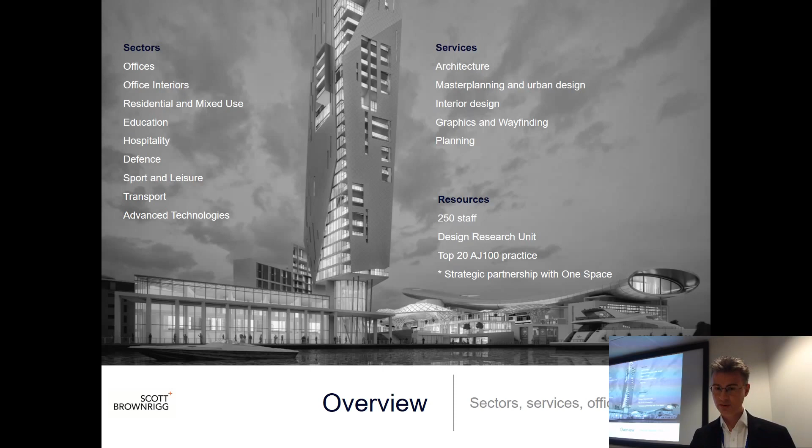What's been very exciting over the last 5 years particularly is that we've begun an expansion into overseas areas. You see here on this diagram our two major regional and fairly new hubs, those being New York and Singapore, and there's a really nice Singaporean connection with the Spark project, which I'll talk a little bit more about as we proceed.

We're doing quite well in terms of the rankings. Obviously they're just measures of how people look at how we're all doing competitively, but we're very pleased to be considered the top 20 architectural practice in the UK.

Just a few examples of recent projects, really just to demonstrate the breadth of experience that we're talking about. And one of the reasons I think that's important is because our experience in the commercial and residential sectors has influenced what we've done with the Spark project and many others as well.

So here you're seeing the Military Medical Museum in Cardiff. You may have seen a little bit about that in the press - it received some direct government funding. And this is the new headquarters building for the chip manufacturer and designer arm in Cambridge.

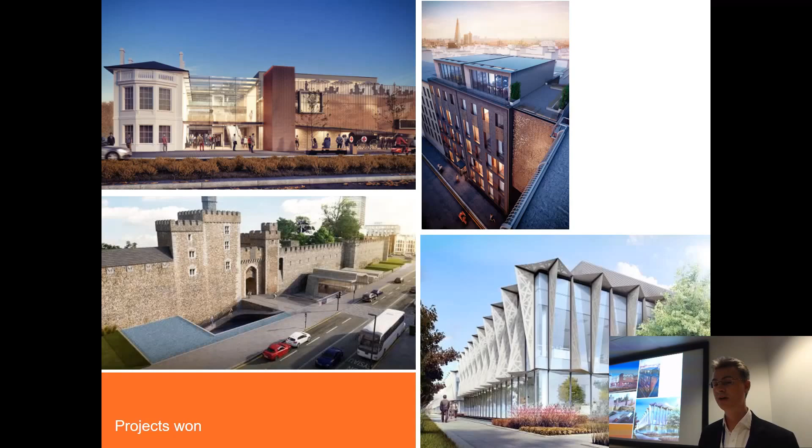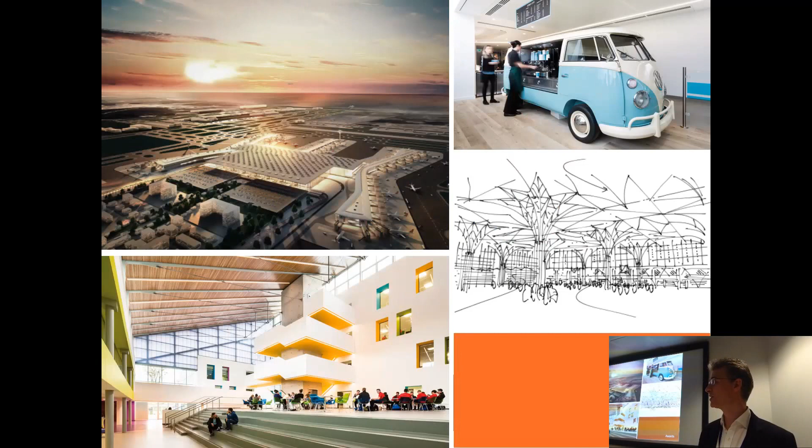Because of our size, obviously we're able to tackle really large projects, and what you see there on the left-hand side is what's currently the world's largest terminal building at an airport under construction. That's Istanbul New Airport, and we were able to be involved in that because we acquired another practice known as GMW 2 years ago, and they're now an integrated part of Scott Brownrigg.

Bottom left there, an FE college, and I'm very interested in some of the talks today because they're also about retrofits. That actually was a disused courtyard space prior to the team getting involved, complete with a stagnant fish pond and leaves blowing around in there.

Chatting to Alex before the presentation, one thing that I've found really stimulating about my business is that we're always moving forwards, we're always looking to change, and of course we live in times of great uncertainty and huge change, and not least of all anticipating what might be happening as we leave the European Union.

And that again is one reason why we're very interested in work overseas, and I think the word that Alex used there about collaboration is a really key word at the moment, and that can be collaborating with other businesses, other professionals, also seeking out the world's best clients.

So these are 3 really new initiatives for Scott Brownrigg, and I'll just focus on the 2 to the right hand side. Design Research Unit, that's a specialist visualization 3D prototyping unit, but it could actually run into all sorts of things in the future, and in a way it's a ring-fenced company within the Scott Brownrigg group.

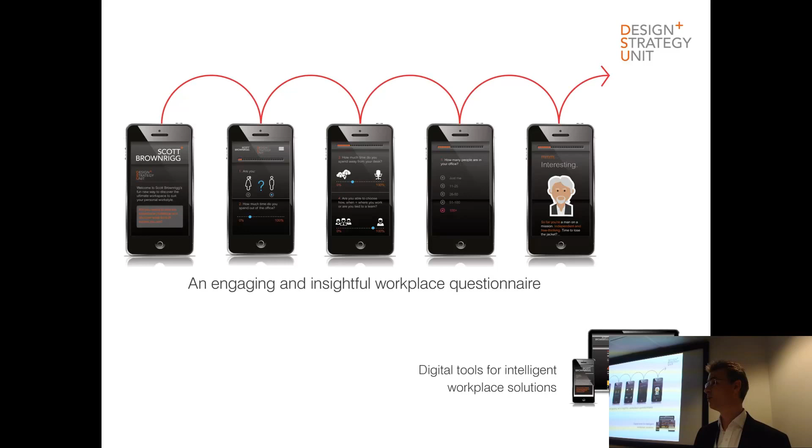Design Strategy Unit is literally very hot off the press, and that's all about workplace strategy. And what we're doing with our colleagues in IT within the business is actually looking at new applications, web-based tools that can help us engage with stakeholders. And I'm quite excited about this because I can see a real relevance for this in the academic workspace market moving forward. So I'd say look out for this as we go into the next years ahead.

I'm just one member of the big team that I've been talking about, and we're really pleased about what we do in terms of giving back to the communities in which we work.

And at Southampton Solent, we were able to offer work placements to students studying the architectural technology degree course down at the university there. And I think we had 4 or 5 through the office who we were able to literally involve in the design and crafting of that building, and particularly key details.

We're also very pleased with our relationship with the Stephen Lawrence Trust, and again, not only are we providing experience, we're also raising funds for them, and we feel really privileged that some of those young students have been able to join the business.

So that's the overview of Scott Brownrigg. Hopefully that puts this into context. This is the Scott Brownrigg team who were involved in the Spark building. I'm just one very lucky member of that team here today representing all these people. I would say the key individuals are all on the top row, as you might well imagine.

Rob Houston there, our senior technician, was an absolute superstar in relation to this particular project. Now, unfortunately, he's not a member of CIAT, so I'm putting lots of pressure on him to engage with you as an organisation and become a member, because I see immense value in institutions representing our various professions.

Also, you have here members of the Singaporean team, and they particularly were involved in the final shaping and crafting of the pod itself. Of course, we were only one small part of a much bigger team, and it's great to see Interserve represented here today. They became the principal contractor for the project, which was procured through a design and build contract at the end of what was then stage E. But you see also the other disciplines ranging from fire consultants, structural engineers, M&E by WSP, Hann Tucker on the acoustic side, Broadstock on FF&E. I'll let you absorb that in your own time.

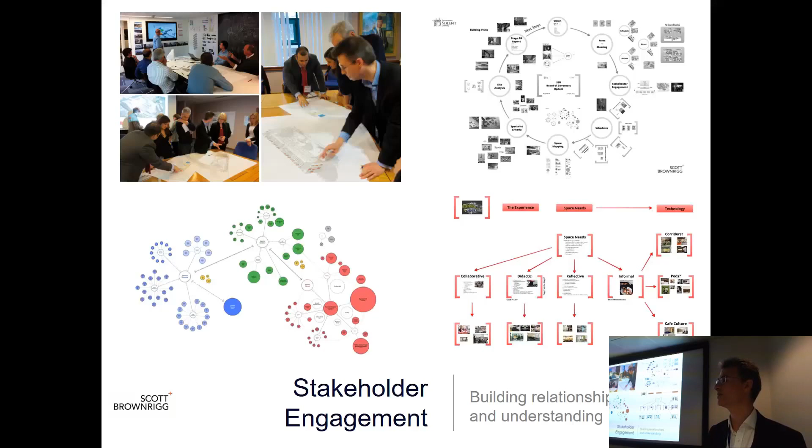A while ago it was pegged as the third fastest growing city in the UK. It's a city where the council has a vision which was really helpful to this particular project. In fact, the Spark was one of the 7 VIP projects in the city master plan, which was much publicised and really driven forward by the city and the city planners.

The city centre you'll see in the next slide is very pleasant, and many people probably haven't heard of Solent University. You're probably more likely to have heard of Southampton University, the big research university that's much older. But it has to be said, as you'll see in this slide, that Solent really has the stronger direct geographic presence with the city centre.

Here in the centre of the slide you can see the university's island site, grade 2 listed 5-hectare central parks, and here all of the civic offices and civic functions, with a great external assembly space. This is the legal quarter with the Jury's Inn Hotel just to the north of the site. Anybody who's a football fan, St Mary's Stadium.

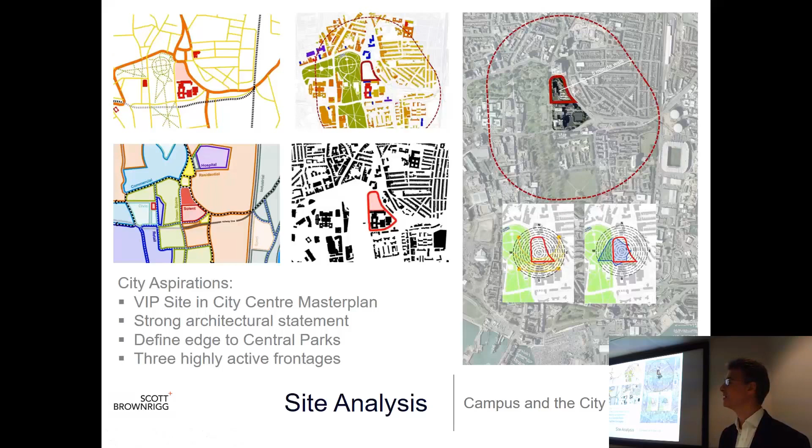So this was their existing campus, and the Spark ultimately rebuilt this portion here, preserving as much land as possible for the university to develop in the future in whatever way it sees as being best - that could be some kind of joint venture, or some kind of enterprise centre.

And that's ultimately what we decided to do, was move that access road to really unlock future development and clear the site for the Spark.

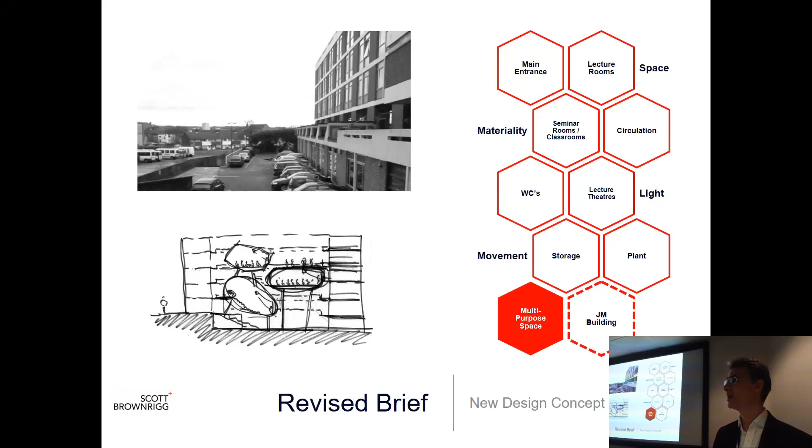Also at a late stage, the university decided they would like to refit the ground floor of the existing JM building. That was great because one big idea here was to make sure we breathe new life into that existing building, which we saw as being something that would be very difficult for the university to replace over time. So here you're seeing an initial concept sketch.

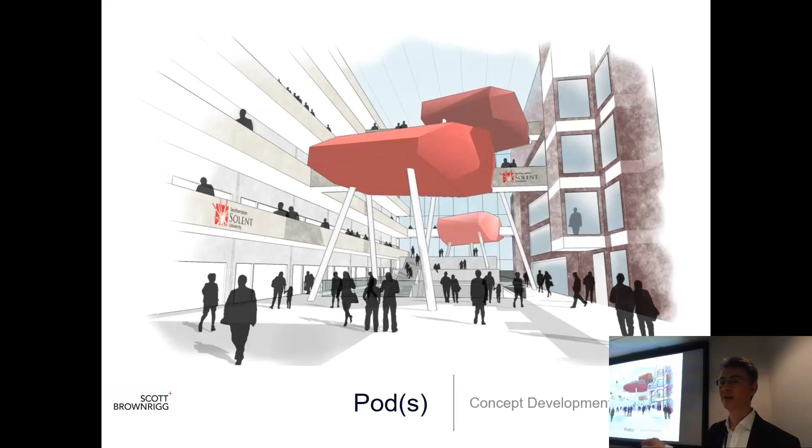We gradually refined the number of pods down to one, mainly for reasons of cost and buildability. That's because we were using the spaces below this new atrium floor to create new lecture spaces, so retaining the existing concrete structures and making use of the level changes, minimising heavy groundworks and minimising having to bring in fill or take materials off site. But in doing so, we needed to achieve clear spans, so you can see the challenges with pod legs and the like.

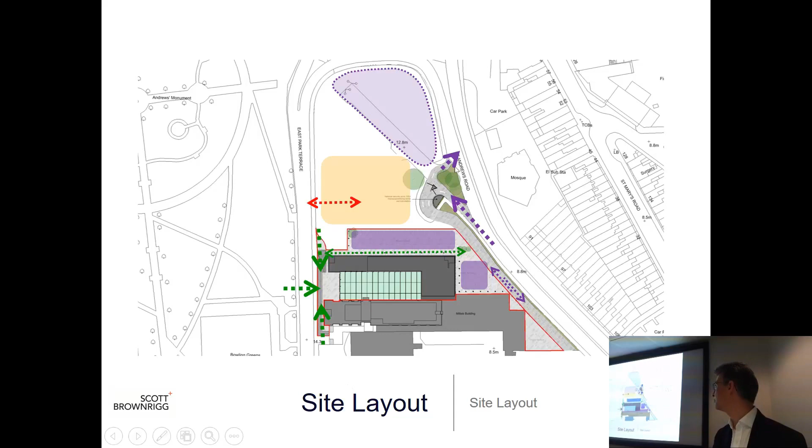This is in essence where we shifted the new vehicle access to the whole campus. Previously it ran pretty much along the line of this dotted green line. We moved it to the periphery, pushing vehicles away from the heart of the campus. Actually this is a 30-mile limit dual carriageway, so this worked really well. There's an ultimate aspiration, particularly from the council, for this to become a predominantly pedestrian route, so by moving vehicles we were also helping the City Council move towards that objective.

Looking at what we called the level 1 plan — we selected level 1 as street level to tie in with the terminology used for the existing JM building. You can see here what we've actually now delivered: a brand new cafe space, in addition to the fine dining conference area, which is supported by accommodation stacking up the building at the far eastern end, forming an L shape with this atrium space between.

The roof lights that were removed, you can see just dashed here. That involved all sorts of complicated backpropping arrangements — a lot of team working through challenges and problems, with engineers talking to the university about phasing, and which academic staff members needed to move out.

And in fact, at this level, we had TV studios, very acoustically sensitive spaces to deal with. Generally, the building plan repeats.

So there are, in essence, within the building, 35 teaching classrooms, lecture rooms at the top level here, amphitheatre seating arrangement leading down to a Harvard style in the round lecture theatre to the west, and here a 200-seat traditional raked lecture theatre below as well.

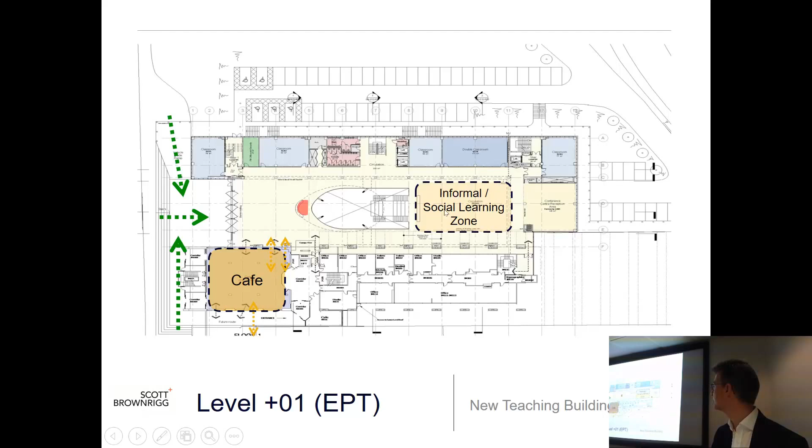At any one time, the building's designed to in effect seat 2,500 students, but the population of the university, as I think one of the earlier slides shows, is about 10,000. So almost every member of the student population makes use of the building on a daily basis. So you've got a lot of throughput of people, a lot of movement, and that was another reason for having this large central atrium space, was to cope with those flows of people.

One thing that's not necessarily highlighted all that well on this slide is the interconnectivity between the new build accommodation and the JM building next door. We wanted to make sure there were lots of routes through at different floor levels to aid movement and really energise that building. You can see here an earlier version of the pod shaping. That was something that we refined over time. And actually there you see the two lecture theatres in cross section.

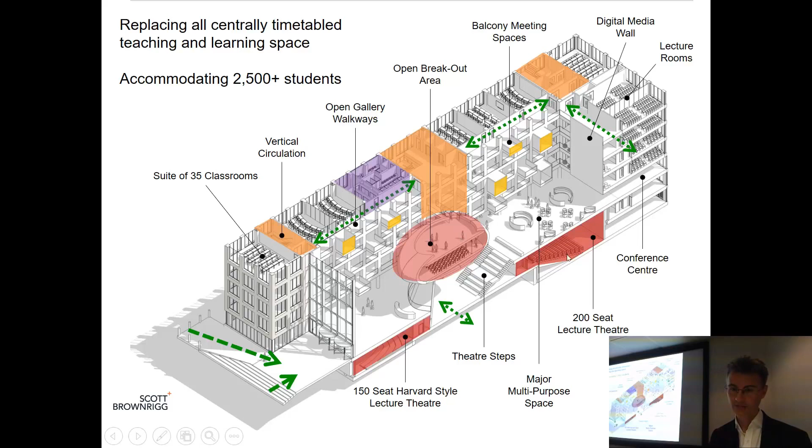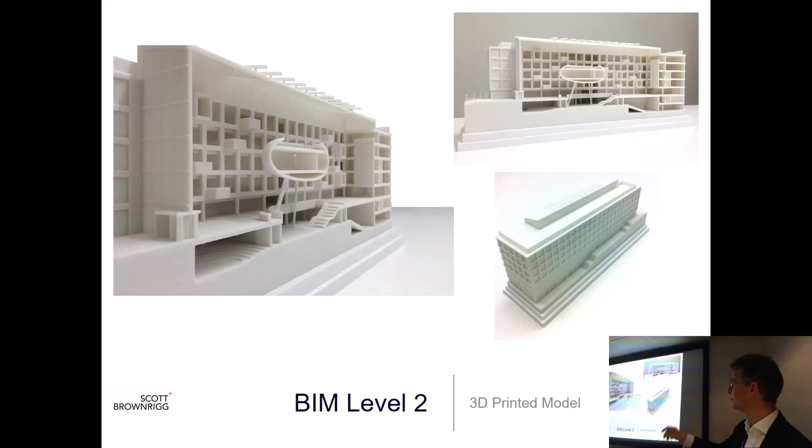The whole of the professional team were also working with BIM, so we had, by the end of the project, something very, very close to a level 2 model. And it was in essence a federated model, with individual models provided by different disciplines.

At a point in time, the university became quite concerned about the flows of people, the widths of the open gallery walkways, particularly at this edge of the site here. How was it going to work with students queuing to transition from lecture to lecture?

So we suggested that we should commission some smart space analysis. We employed Buro Happold to look at the model and, using their smart space technology, do some agent-based modelling of key pressure points at key times of the day. So peak arrivals, peak departures, and the like. And the result of that is that we used the information and the recommendations they made to refine and tweak stair widths, gallery widths, door widths, things of that nature, even the placement of the staircases within the floor plan.

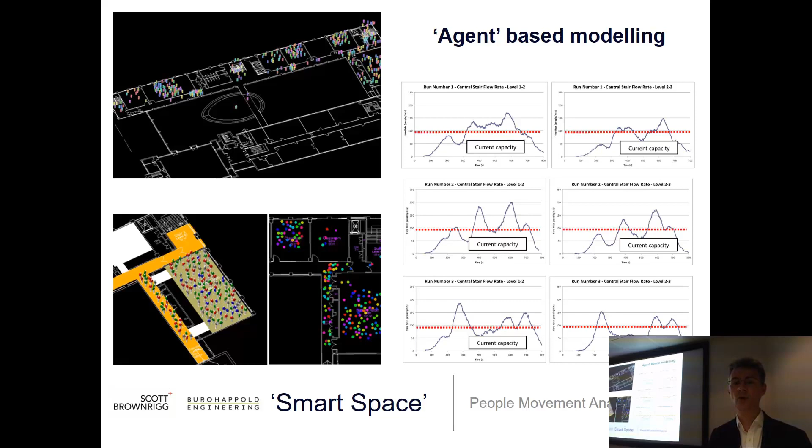This is very much how we like to work as a practice. I'm sure we're not alone in this. I'm sure many of you work in this way. But we found this to be really very helpful with the client team, particularly towards the end of stage E, or what I would now probably say stage 4, as a broad comparison, to actually be able to talk to the team and say, okay, well, this is the balustrade system we're proposing.

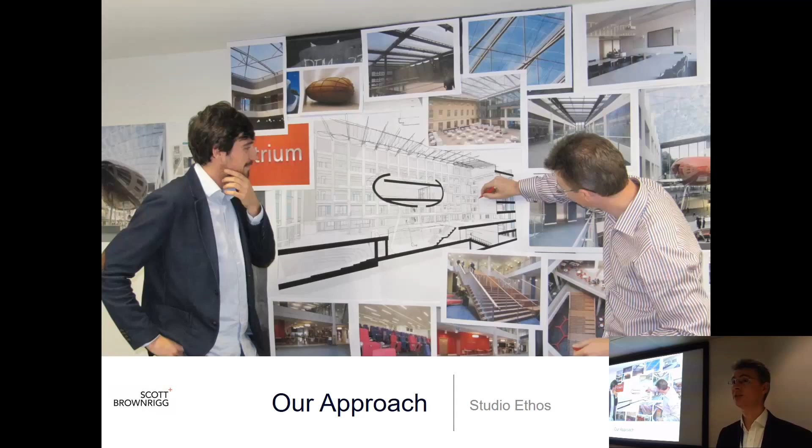It's going to be glass with a stainless steel handrail bracketed off with bolts and the like. This is what we're thinking for what was then proposed as an ETFE roof. These are the lecture theatre seats. So it was a great way of narrating the design to the client team and explaining to them what was going to be delivered, particularly by the contractor at the end of the project.

Sustainability and quality, obviously two key themes for today. This cross-sectional drawing perspective illustrates some of the really key big moves we made towards making this a sustainable building, and more specifically towards achieving the BREEAM Excellent target rating.

So just talking you through some of this, in terms of on-site renewables, we did explore linking into the geothermal city main. However, at that particular point in time, there were big concerns about how the heat was being pumped into that system. They were having to use gas-fired means to do that. There were also some capacity issues. So rather than connecting to that existing system, we decided to provide a large PV array at roof level.

And of course, the university is fairly energy hungry, so this is energy they can use, but at night time and things, anything surplus can go back into the grid.

One of the really big strategic moves was to make sure that most of the teaching spaces face north. So this is the north facade here. What that did is help reduce unhelpful solar gains and brought consistent, constant north light into each of the spaces, reducing lighting requirements. So what you see on the facade here are, broadly speaking, floor to ceiling double glazed units.

For reasons relating to outside air quality and acoustics, the roads surrounding the site are fairly noisy. We're also very close to the flight path for Southampton City Airport, so what we couldn't have is noise disturbing the teaching sessions. So the building is actually a sealed building, or certainly the teaching spaces are. We introduce air via active chilled beams, so the air is tempered with central plant, pushed along the corridor spaces in ductwork here, into the classrooms via the chilled beams.

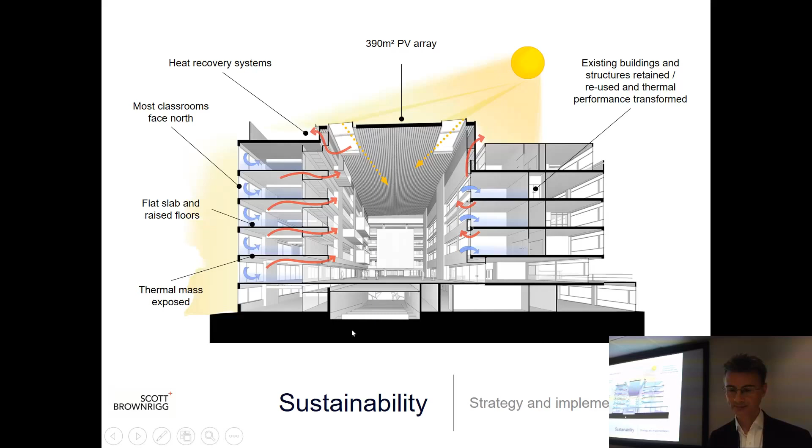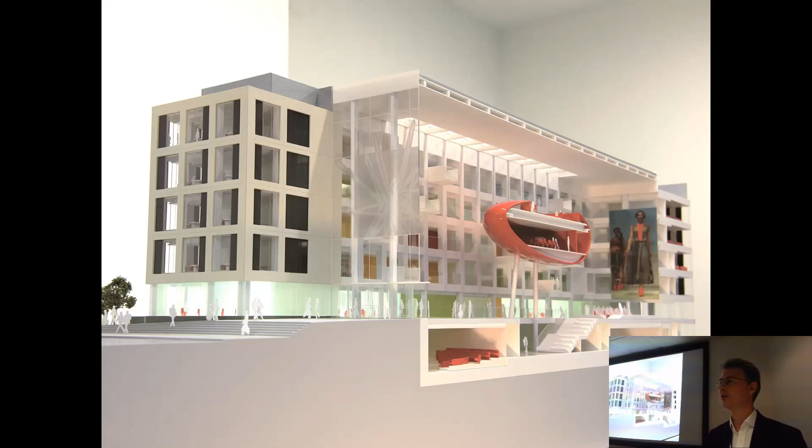So I spoke a little bit there about the functional side of the pod. And also at the start of the presentation, and throughout, I've alluded to doing something distinctive. This is really what it's all about, and this is the spark, the university's logo, after which the building has now been named.

The idea for that very special object goes right back to the interview, where after a very successful question and answer session and presentation, the Vice Chancellor, with me sitting in the middle and senior colleagues either side, looked at me and said, really enjoyed that presentation, but Ian, can you tell me what you think the university logo symbolises? As prepared as the three of us were for this presentation, that just wasn't a question we'd really thought about or considered. By the way, I'd suggest you do think about that whenever you're presenting to potential new clients.

So I did my best to recall things I'd read in the brief, and if I'm honest, I waffled a little bit, as I'm doing now. The Vice-Chancellor, with very good humour - he was also a Yorkshireman, so I think we had a bit of rapport going there - said, let me just stop you there, Ian, and let me tell you what I think the logo means to the university. These are some of the words that he used. From that moment forwards, and we were very relieved that dialogue hadn't gone against us, it had actually helped us, we held all of these things in our minds, and this is what we were thinking about when we started to sketch those initial forms for the pod itself.

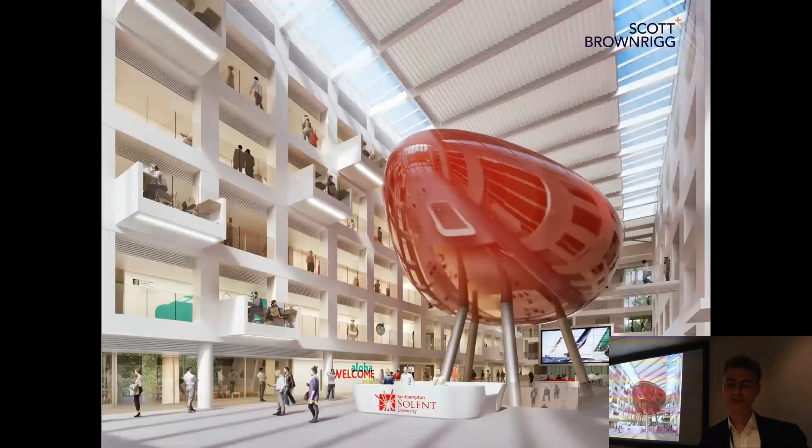This was the first visualization we produced, very early on in the process, right at the start of stage C. We had to confess to the university we actually had no idea what the accommodation was going to look like behind that perforated screen and series of projecting boxes. But this was the vision for the pod and this multi-purpose space, which had never formed part of the original brief. The university got incredibly excited about how they could use that for all sorts of different things, and here you see the linking elements as well.

There's a slight modification to this image in that originally we had an ETFE roof. In the end, discussing that with the university, they became very concerned about rain noise, the drumming effect that can happen with ETFE in a large space like this. There were also concerns about seagull attack - apparently with ETFE, particularly in smaller areas at roof level in coastal towns, seagulls tend to attack it, or at best drop stones onto it thinking it's water. That's the psychological behaviour of the seagull, apparently.

What's been great throughout the project is people have really engaged with this as an idea, and it's been likened to all sorts of things, including one of my favourite childhood movies, Flight of the Navigator. Slightly more sinister, War of the Worlds. Obviously the pod actually has 4 legs, not 3, but I can see where people are coming from.

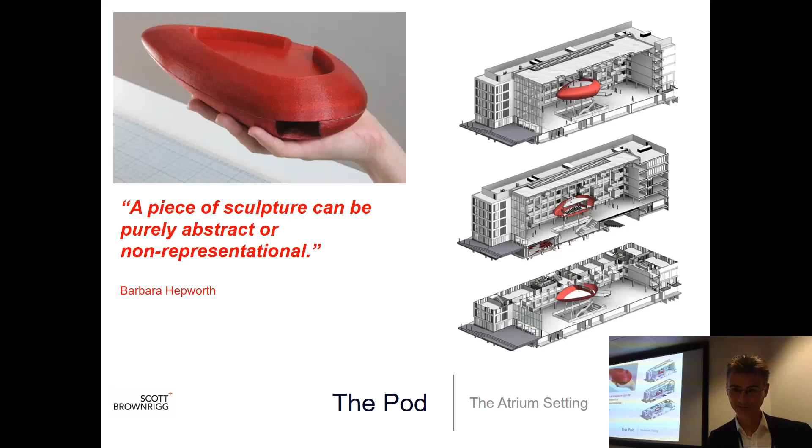Other challenges: having designed this complicated 3D geometric form, we then had to propose a way of actually constructing it. If I'm honest, at the early stages we didn't really know how we were going to achieve that. For a long time we thought we'd be building it from GRP technology, but in the end we couldn't get companies of an appropriate scale interested in the project. That included me talking to the people who manufacture hulls for Sunseeker down in Poole and other big motor yachts.

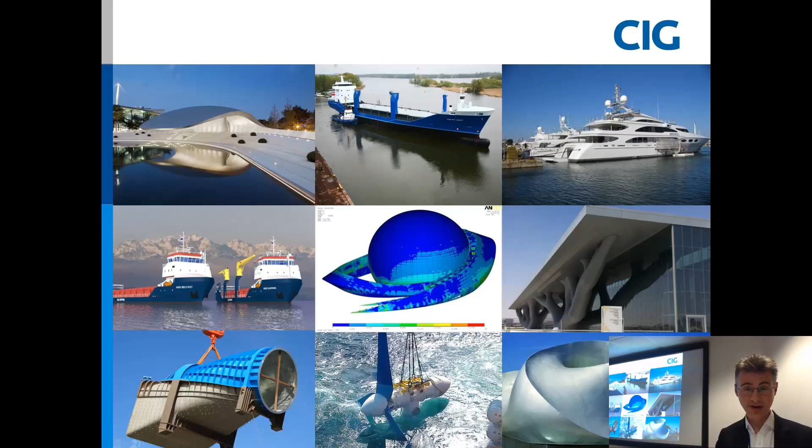Then we met CIG, who were absolutely fantastic in the contribution they brought to the project. If you ever have a really complicated geometric form and can see an application for steel, these are the people to talk to.

They're based in Groningen in northern Holland, and originally they were a cooperative of steel plate makers for shipbuilding packages. They came together because they realised Holland was no longer competitive with places like Romania and more recently South Korea, where ships are being built on a massive scale. So they came together to source and make all their steel plate together and sell it to surrounding shipbuilders. In fact, they sell steel plate to the people who make super yachts for people like Roman Abramovich. The reason their steel plate is used is because it's so accurate, it requires very little fairing and finishing, so they don't have to apply lots of filler. They can control the shape of the plate to such accuracy that it's super smooth when it's painted up.

This is the works in Groningen. The canal previously led up to the North Sea, and here is the cutting plant, with laser cutters I'll show you in a moment. This is the bending plant, where you can see the steel plate. It's probably important to highlight that the steel plate for the pod was actually sourced from what was Tata Steel in Port Talbot. So it's British steel going over to Holland, being cut and shaped, and then brought back to the UK.

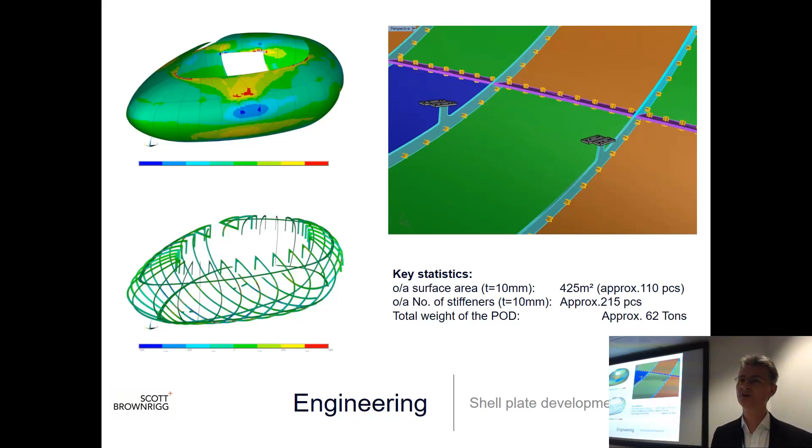Here we have some of the structural analysis drawings. CIG have, over the years, invested massively in software, cutting technology and bending technology to support the formation of things like this. They're involved in the Emirates Air Line cable car pylons that go across the Thames, Lord's Media Stand, which was one of their very first UK projects, the headquarters for Porsche in Germany, and most recently the Crab Studio at Bournemouth University of the Arts. They're real niche specialists in what they do, and that in essence is why we had to go to an overseas company to achieve this. There's nobody quite like them in the world with their capability.

Integrated modelling: they were working with their own specialist systems, but here you see all the various models overlap - Scott White and Hookins' structural model, our architectural model, CIG's fabrication model, and somewhere deep in there as well, the M&E model.

One of the big things we had to think about was how we actually assemble this project on site, the series of panels. What you see at the end here, this V structure, was actually temporary support work to allow a reasonably large mobile crane to be installed on top of the pod, on the concrete deck, to hoist the various panels into position.

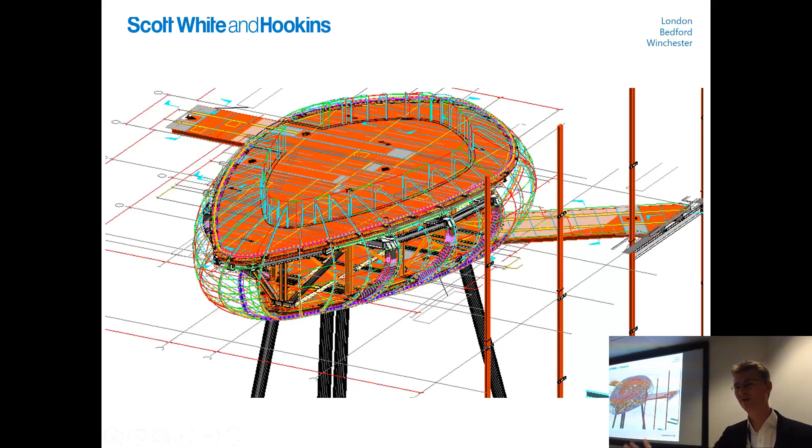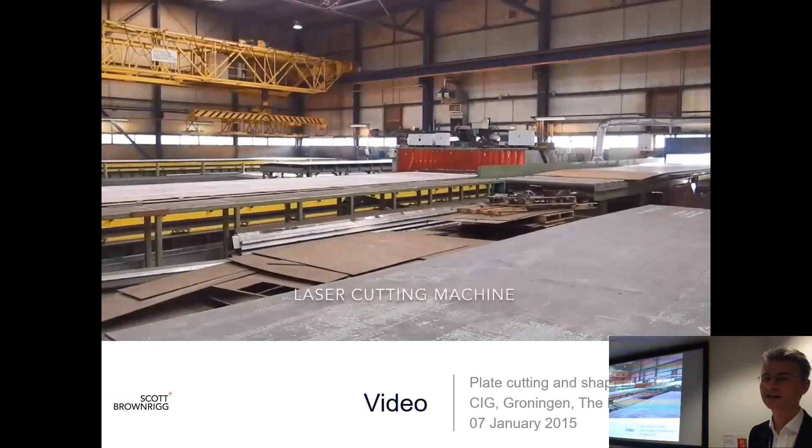Quick video here - I probably won't show you all of this in the interest of time, but it'll give you a flavour of how CIG craft the steel plate. This is the laser cutting plant. They're using large gantry cranes with magnets attached, which takes it onto the cutting beds.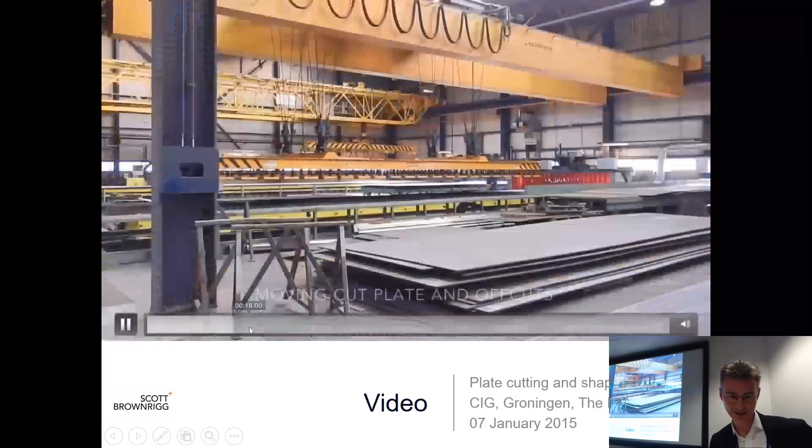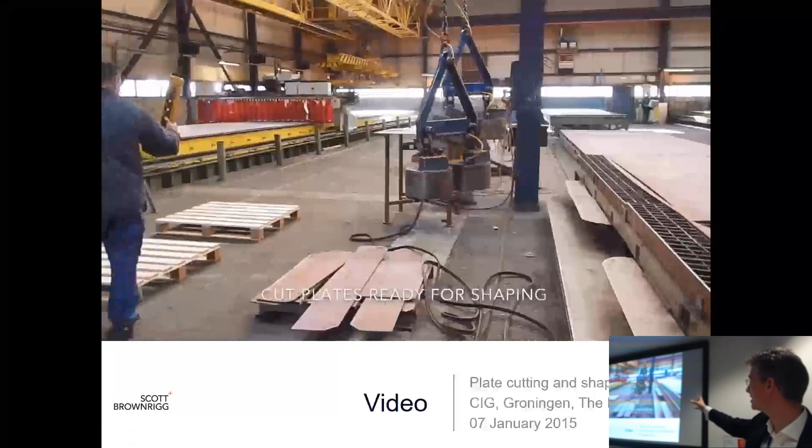Skip forward a little bit. And then you have operatives here with gantry crane controlled magnets, lifting small pieces. The curved pieces you see here are actual pieces of the pod that made their way into the final construction, which later went on to the bending plant, which you'll see shortly.

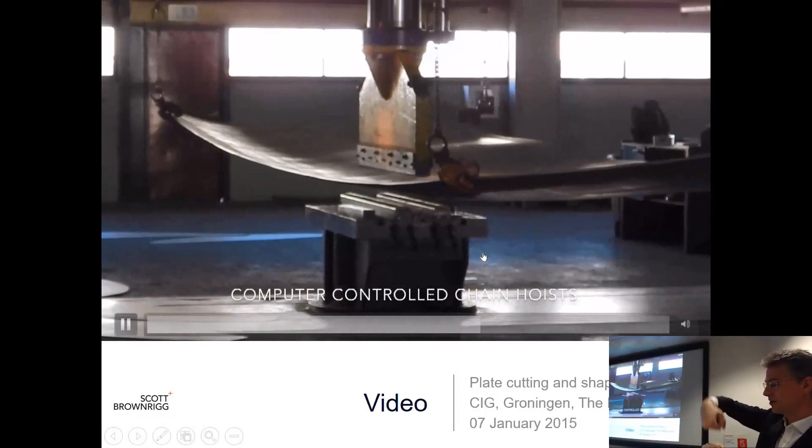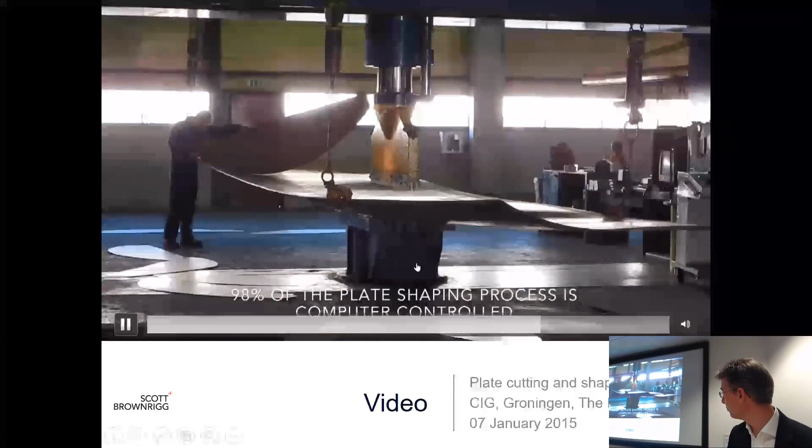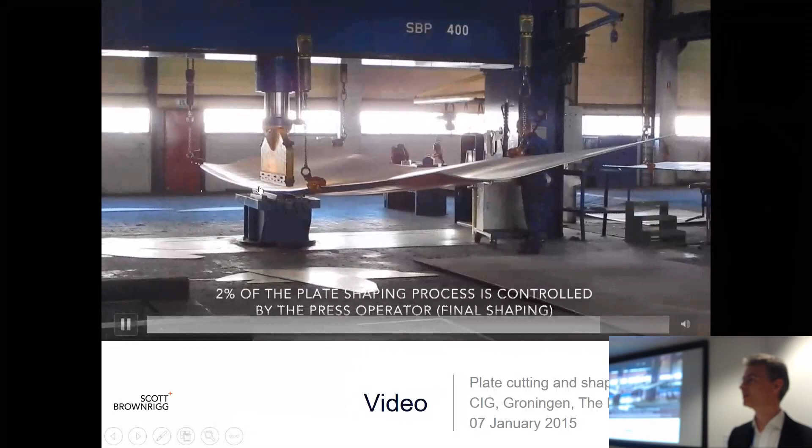This is the bending press, actually known as an English press - a fixed base, and the press head literally presses down on targeted parts of the plate, moved underneath by this chain hoist, mostly controlled by a computer. As you can see on the floor, the chap is holding templates for checking the final shaping, lining those templates up with pre-printed, inkjet printed lines on the steel plate, which were put in place as part of the laser cutting process.

From the bending plant, there are a series of sections. You can see here the welded lines which were brought together. This was the benchmark sample that we requested as part of the detailed specification. CIG were working as a subcontractor to Interserve, I probably should have emphasised earlier.

But the great thing is that you had a combination of very advanced manufacturing techniques coming together with real artisan craft skills - lots and lots of welding, as you can see here, and then people grinding that finish, polishing it with manual handheld tools.

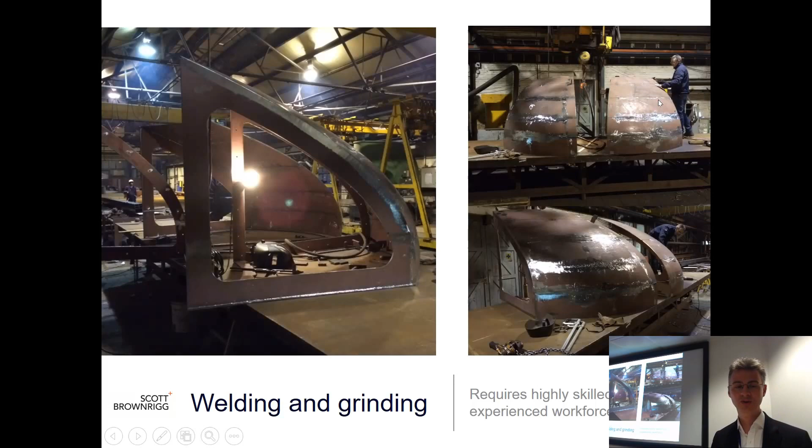But you can see the finish that CIG achieved was pretty close to that of car bodywork, which was very much part of our vision - a reflective finish that was going to reflect what was going on in the atrium space, show the trees moving in the park and the like.

This is how the pod panels were ultimately assembled. You can see the weld lines here on the back. Then they're brought together with back-to-back channels, bolted into place, and then each section is bolted to the next.

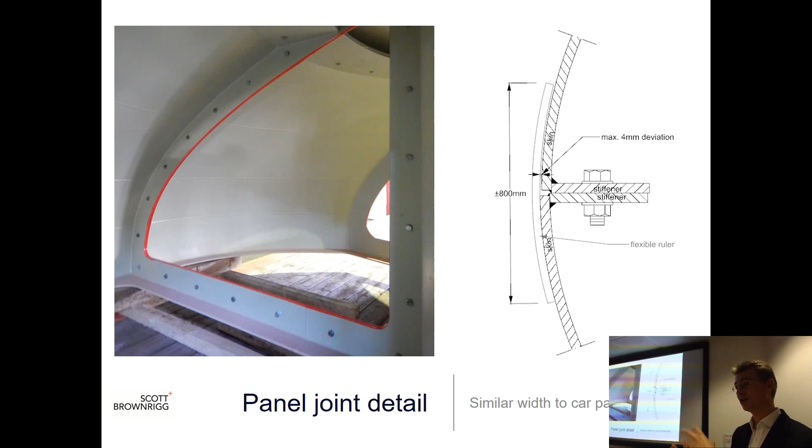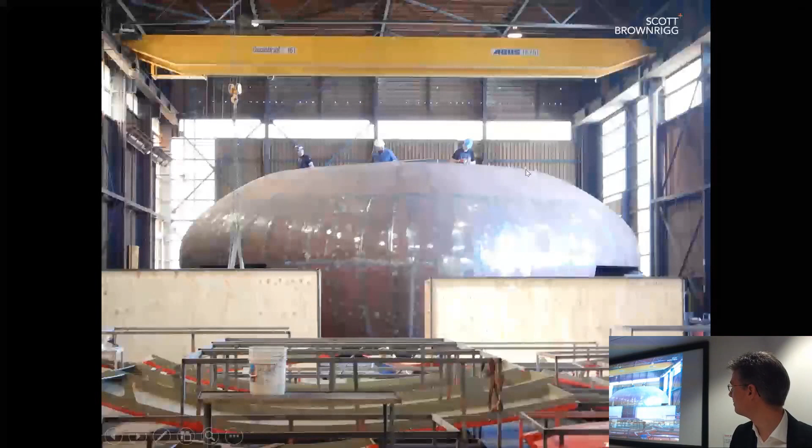And again, you see the scale of the object here, the scale of the challenge, the ambition, just how bold this is. But great attention to detail - they fabricated all of these metal frames to suspend each pod panel to protect this red finish, so these could all be stacked in shipping containers and brought to the site.

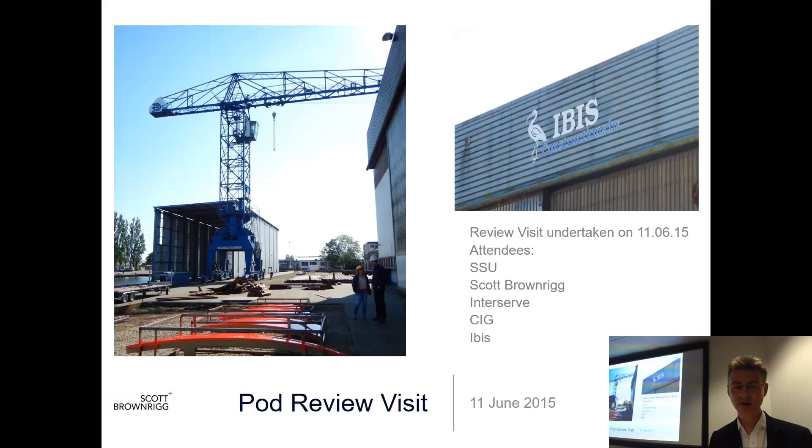We took the client on these visits as well, so they could see the way this was developing. They covered it in social media, used it as part of promotional material to get the academics at the university excited about the project. This was June 2015, a year ahead of completion - just a closer view of the panels suspended in their shipping crates and frames.

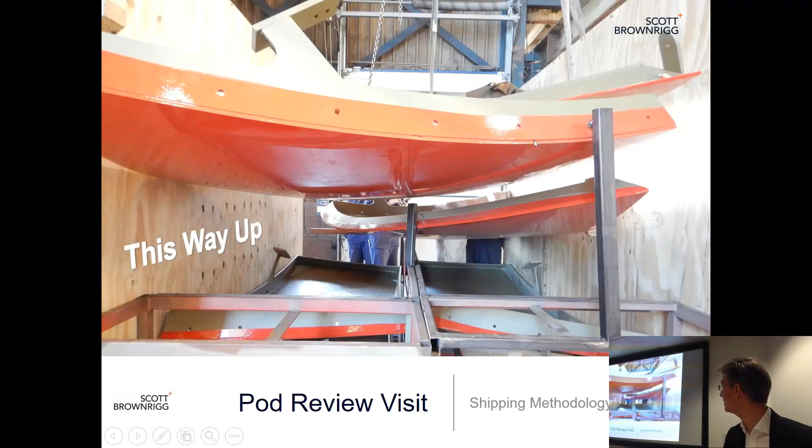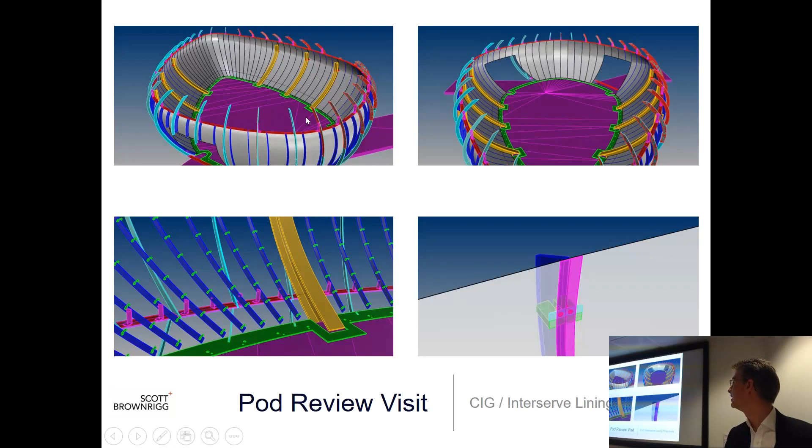But as with all design and build projects, there was quite a lot more design work to do, completing the design intent. One thing I wish I'd spent more time on at the start of the project was actually the interior lining of the pod and how that was going to come together. We had to do a lot of work in the latter stages of construction, thinking about how we were going to use a perforated lining so we could deal with acoustics, create reverberation control, but also for that to be sufficiently robust.

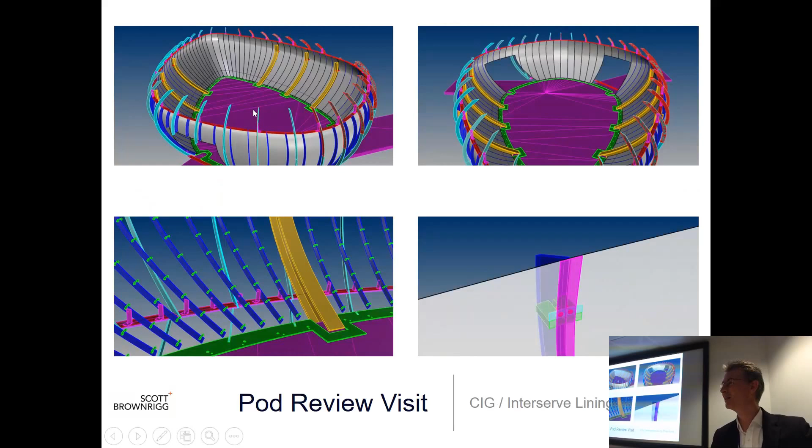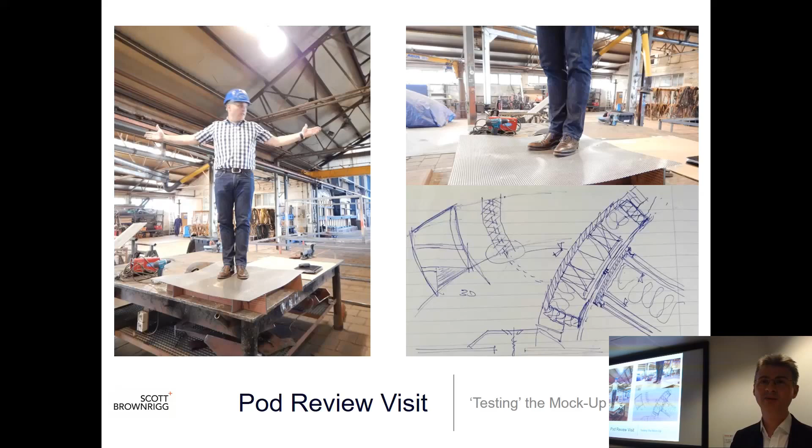I think you never underestimate the power of prototyping when you're dealing with something like this, and actually mock-ups, benchmark tests. And these were hand-drawn sketches we were looking at, literally with CIG, working out, collaborating, how were we going to get the right result for the whole project and for the university.

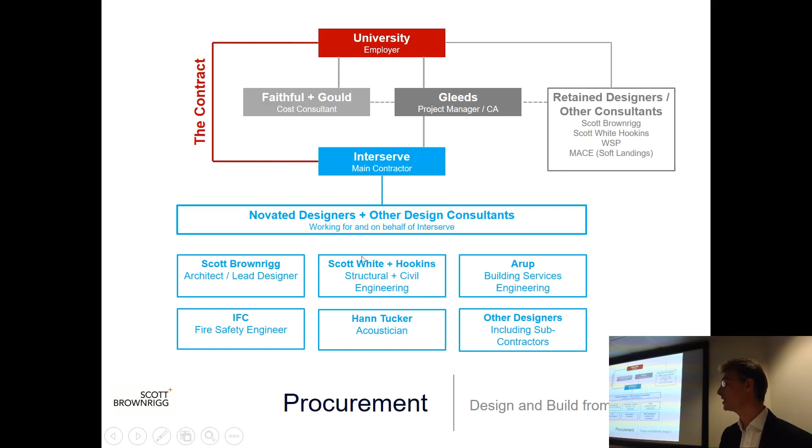Talks a little bit about procurement. I won't dwell on this too much, but that really is just a summary of the contractual arrangements. So over here, members of the retained team - Gleeds were fulfilling the overall role of contract administrator and PM, F&G on the cost consultancy side, and of course Interserve as the main contractor, with the novated consultants and additional consultants they brought on board sitting below as well.

Very, very pleased that the project was showcased as part of a booklet looking at how people might approach the new CDM regs as they were launched in 2015. Paul Bussey used to work for Scott Brownrigg, so he was very closely involved, fulfilling the role of CDMC originally, and then PD towards principal designer towards the latter stages of the project. So the project actually transitioned, switching from the former regulations to the current ones.

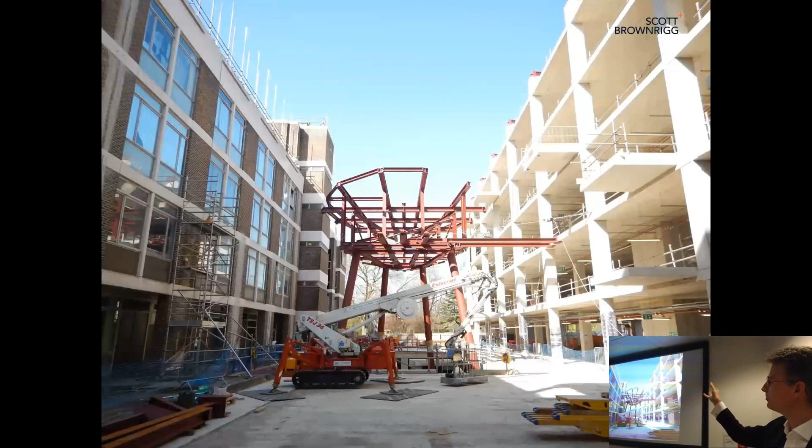Some installation photos - this was the framework around which the pod panels are actually clad. You can see some temporary supporting struts there, and this was actually the crane that later had to be stripped. It was too heavy for the various hoists in the building, so we had to take the caterpillars off, the supporting leg structures, then crane that into place and reassemble it, which was not something people normally have to do with pieces of plant equipment.

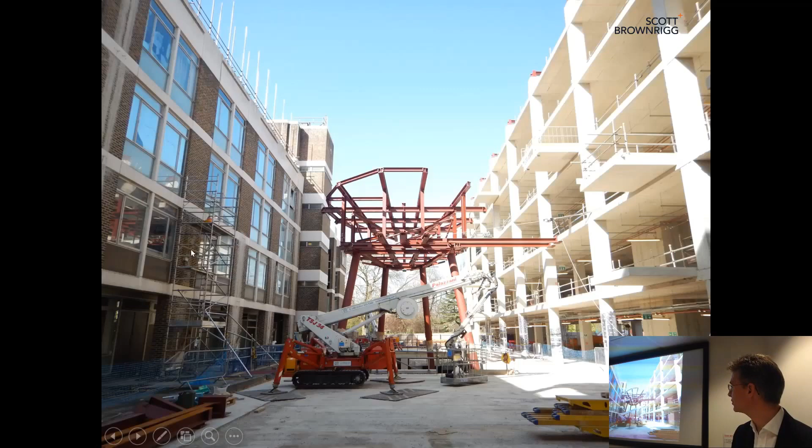You can see the flat slabs here, cantilevered projecting bays, a very simple repetitive structure, and you're just starting to see scaffold going up here to deal with window replacement and asbestos removal. Skipping forward a few months, I think this was...

Intumescent painting to the pod, everything you see in white. Scaffolding for the dry lining to the new build accommodation, and Interserve elected to build a birdcage scaffold here so they could deal with easier hoisting of the panels to the belly of the pod, if you like.

On the fire front, probably worth mentioning that the whole approach revolved around BS 9999. So we had to commission computational fluid dynamics to test how smoke would behave in a fire and evacuation scenario - it's a managed evacuation of the building with refuges at either end.

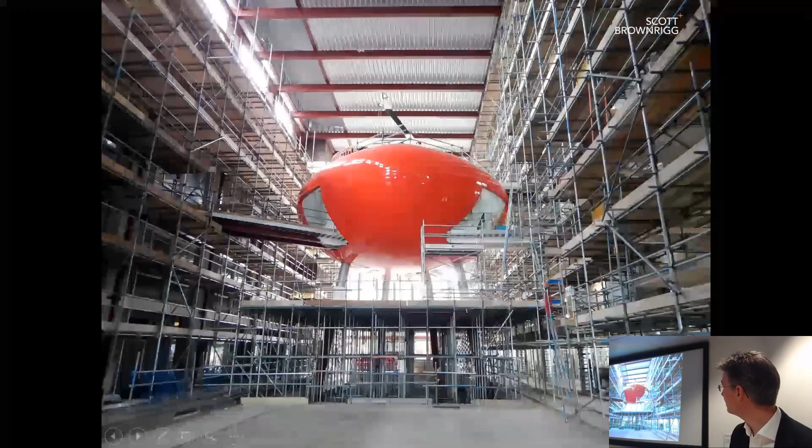Going forward, you can just see the crane on top of the pod there. For the underside of the pod, things were lifted into place and then connected, and you might just be able to make them out here, connected with bottle screws to the underside of the structure.

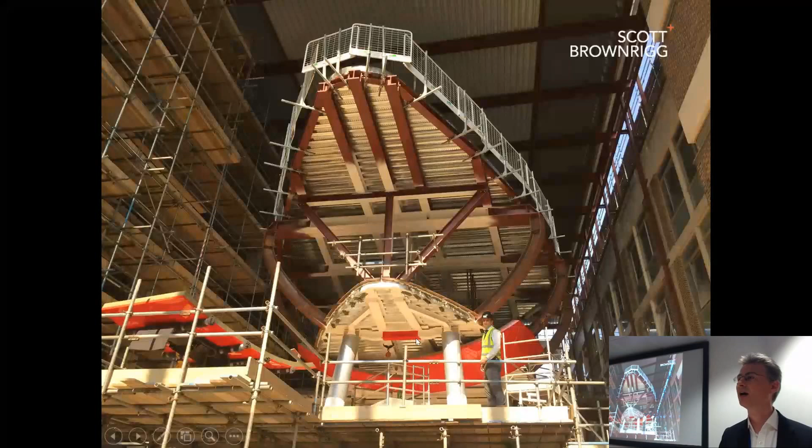One person I'd really like to single out is Sam Teremetz, the project director from Interserve based on site. I think one of the reasons this project was the success I think it is, is his attention to detail and that of his team. He was a great leader on site, somebody who really understood where we were coming from architecturally, and really embraced and was passionate about delivering the design as faithfully as possible.

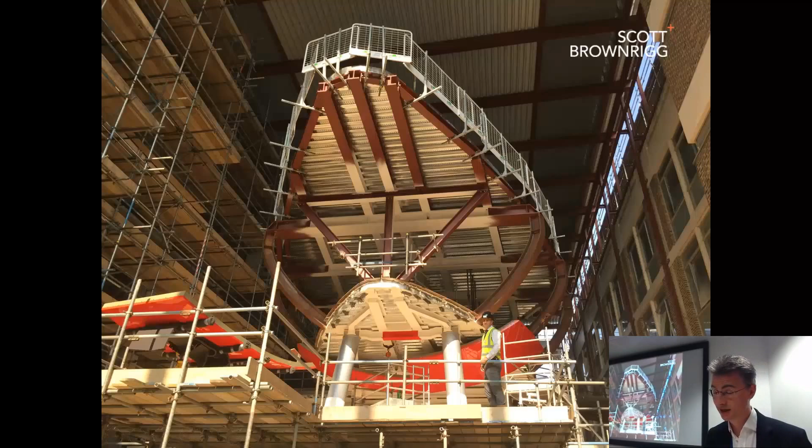That's the temporary steelwork I spoke about earlier, just starting to close up. One of the challenges here was we actually had to provide a crawl space for operatives to work on adjusting the bottle screws to get the panels into alignment. That meant we had to form some escape hatches in the floor so they could get out at the end of the day. We didn't want to leave anybody permanently entombed in the pod.

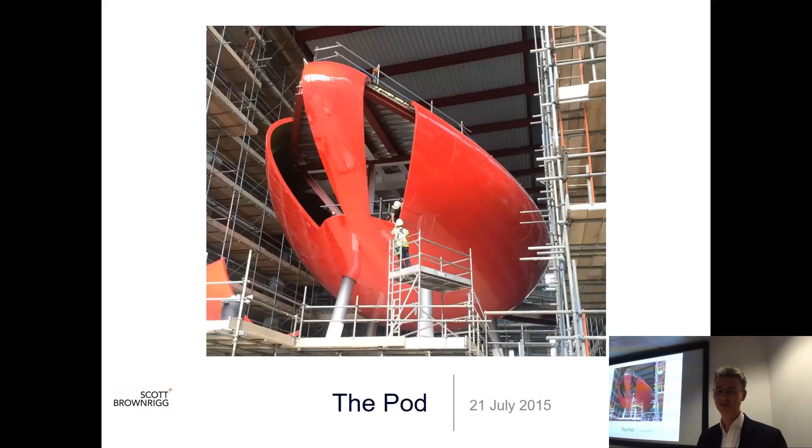Onto the external facade, and I'm conscious we've got about 7 minutes left. We looked at lots of different options, but what we were trying to achieve was something that related to the civic buildings, so responded to the Portland stone finishes of things like the Guildhall, had a very strong civic presence, anchored the university as being something here to stay for the future, something very enduring.

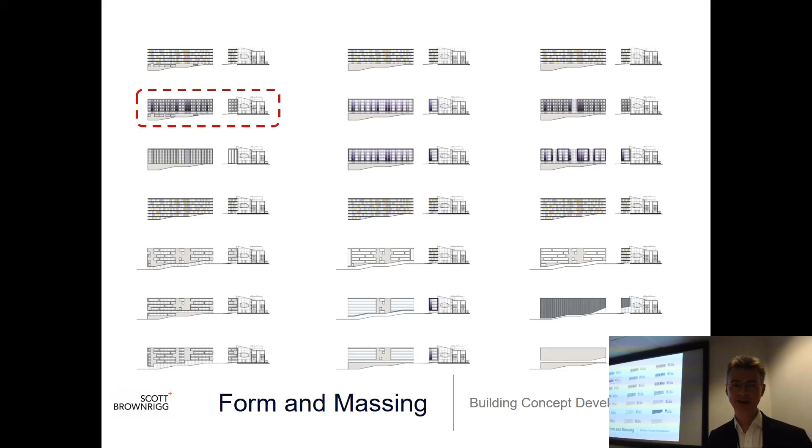What you're seeing outlined in red there was the design that we opted for, and then just a very simple diagram. We had to deal with some level changes, so to do that we brought in this device of what became the dark grey podium, then this ribbon of highly translucent reglit cladding panels around the edge at street level, then a very repetitive design for the upper floors.

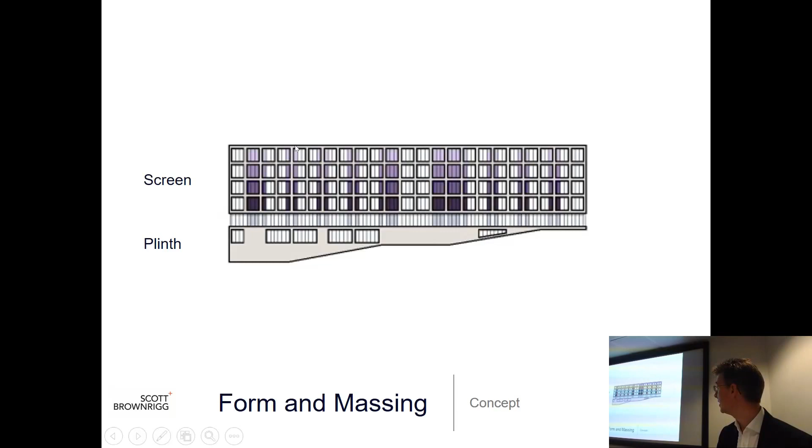Again, producing visuals, helping the client understand what we were going to deliver, and then remaining faithful to that image, or a series of images, all the way through the project. I think we keep doing this now going forward as a practice, because having a benchmark image from which everyone can go back to really helps people buy into what you're trying to deliver. It's great to have a conversation with the contractor and say, yeah, okay, really like what you're suggesting there, let's now see how that relates to this vision - how can we get the final delivered product to look exactly like this?

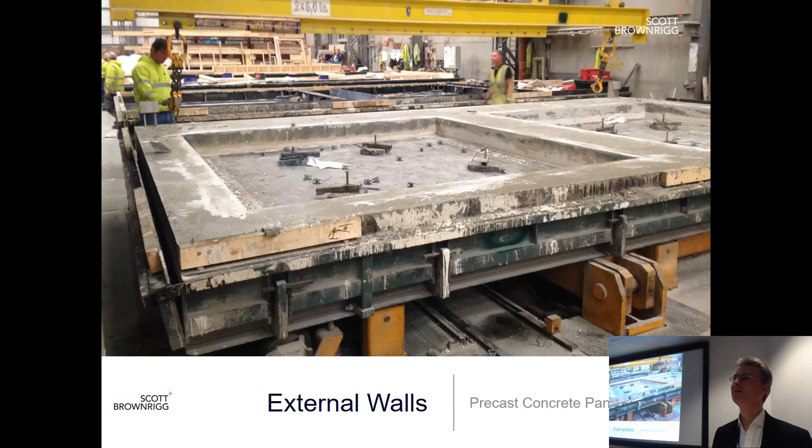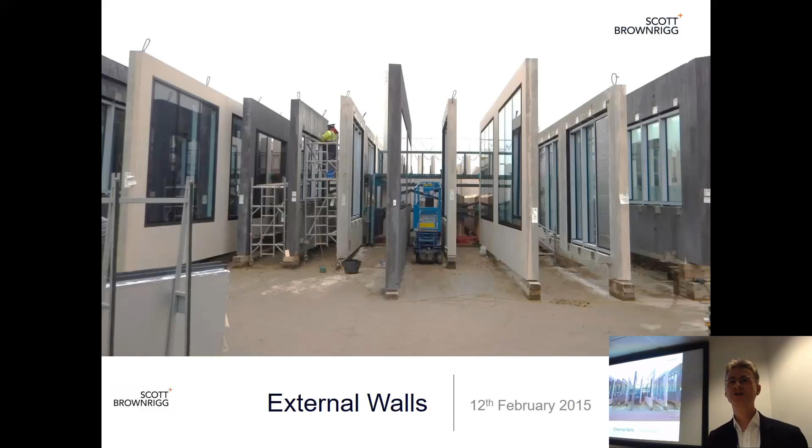For the whole of the external facade, Interserve engaged Techcrete UK Limited, based near Scunthorpe, North Lincolnshire, and they manufactured the external cladding panels, which were brought to site pre-glazed. Here you see those panels stacked up in the works. We went up to site along with Gleeds to do valuations, look at the quality of the works, and the quality of the product was absolutely exceptional.

The real benefit of this was that the whole of the facade system - you can see one of the typical facade modules there, nominally 3.6 by 7.2 meters - was being installed by one of the largest mobile cranes in the UK at the time. There was something like 110 individual cladding modules, but it meant the whole of the external envelope was installed in a period of between 5 and 6 weeks - very quick speed of installation, with no need for scaffolding to the external facade.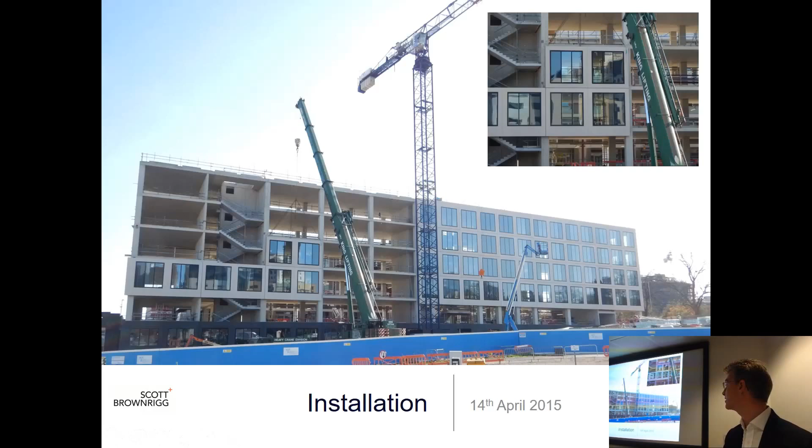All of the weather sealing between these panels, the silicon jointing, was all done from mobile platforms. So that saved on the cost of prelims, great quality product, and that cost saved could ultimately be spent on other things. Great for programme.

I think one of the things that I thought was absolutely fabulous about this project was the fact that everybody in the whole team was thinking about all of the details. I've not previously been involved in a project where so many people of so many different disciplines were involved in creating something in the round.

So here we were talking to branding specialists who were at the time looking at rebranding the whole university. Thankfully they didn't reinvent the logo, but what they were very keen on doing was expressing the different disciplines that the university has become famous for, and also the disciplines they're progressing with going forward. So you'll see things that allude to architectural technology potentially here, as well as maritime innovations. You might not know, but things like the hovercraft - Christopher Cockerell invented the hovercraft in Southampton.

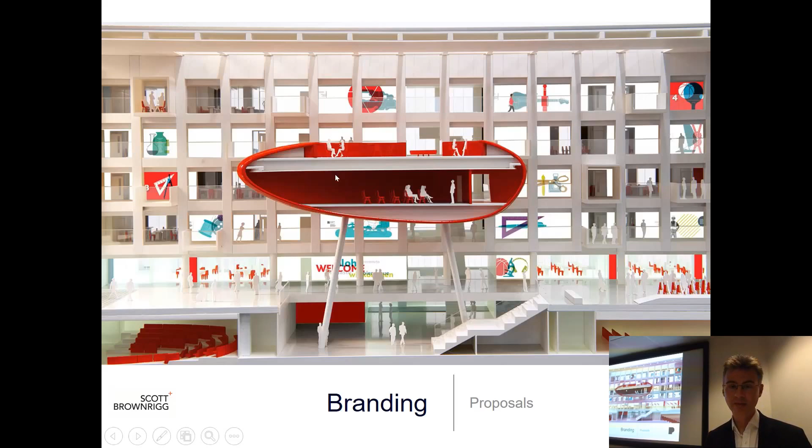They have a very successful media school as well, and they were very involved in publicising this project and capturing what we did. Southampton and R.J. Mitchell, the designer of the Spitfire, also synonymous with Southampton and based there. So the university have incorporated that as a graphic in lots of their marketing material, course provision.

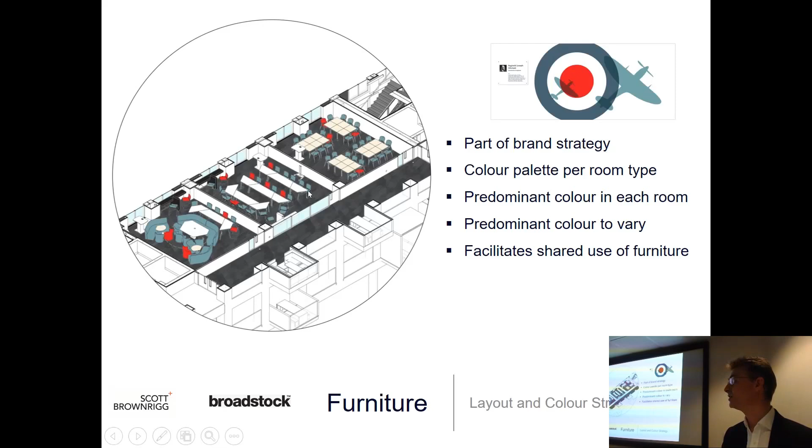As well as branding, we were very heavily involved in the FF&E solutions, the fixed and mobile furniture. This was all about delivering what the future of teaching and learning would look like at Solent. So in addition to traditional square tables and chairs, we were looking at much more interesting cafe style furniture as well. Some collaborative learning suites, these became known as, all designed for 25 to 30 people. There were also some 50 to 60 person rooms, which were pretty much this double module.

So what makes the Spark unique, or what would I say makes it unique? Well, it's the synergy of all the different things I've been talking about, all coming together, I think, to make something really interesting and really relevant for particularly universities at this point in time and going forwards.

I'll skip through these things quite quickly, but how might we measure the success of this project? Well, it was very well received when presented in China. Several hundred students stood up in this enormous secondary school and applauded the professor who was presenting this, the moment he transitioned to the slide. I'd love to think it's about the design. I suspect it might be more to do with the colour red, which of course in China is very auspicious.

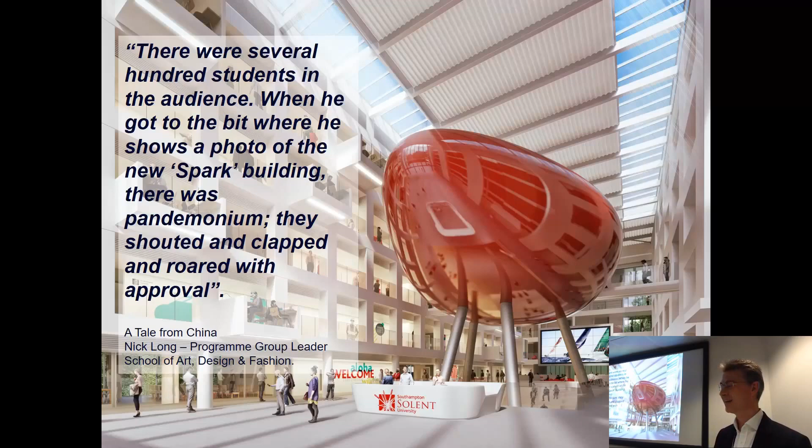But the same professor was a specialist in typography and graphic design. And at a very late stage in the project, he said, can we integrate some permanent artwork into the project? We said, well, we think we probably can. How about the glazed balustrading? So he designed a font especially for the project. I'm told that the letter O's are supposed to evoke thoughts of the pod, and the angle of the Y's and the K's is reflective of the legs of the pod as well. Students were involved in selecting quotes, and there was a series of inspirational quotes around that atrium void.

It was fabulous how well the various specialists and also the labour force working on the project engaged with that very special element. And we're really genuinely proud of it.

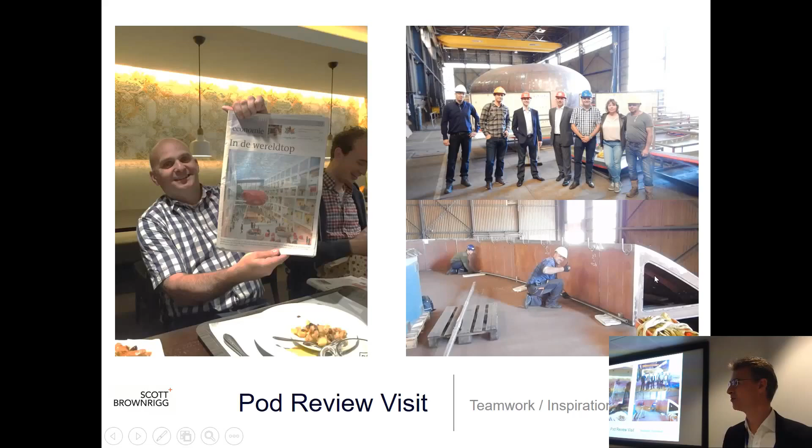These are the owners of the fabrication company IBIS, who were subcontractors to CIG, and they came over to the launch of the pod, as it was called, which happened ahead of the topping out of the building, and they shared a glass of fizz with us all. I thought it was fabulous, given that he individually cut this all into pieces with an angle grinder. He was the one man working night and day doing that. And if you've ever used an angle grinder, you'll know how difficult that is to cut a straight line.

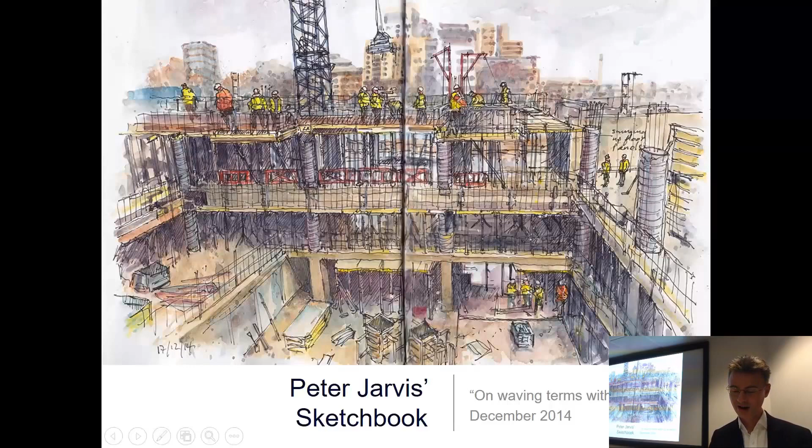The academics in the adjacent building were obviously living and breathing what was going on the site in the same way as the contractor and their operatives. It was great that Peter Jarvis at the university captured the progress of the works in a series of wonderful sketches like this. What we're hoping to do is have an exhibition in our offices in London and elsewhere to showcase his work.

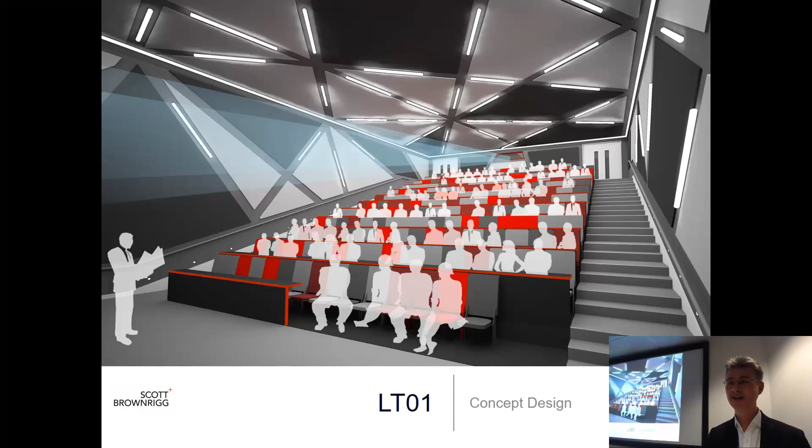Surprisingly, but pleasingly, the university are amazed how closely the whole team managed to stick to the concept images in terms of the delivery of the key spaces and the building as a whole.

Here you see another interpretation of the Spark logo, so a very dynamic effect. And what you're seeing here is a mixture of absorbent and reflective panels to control acoustics.

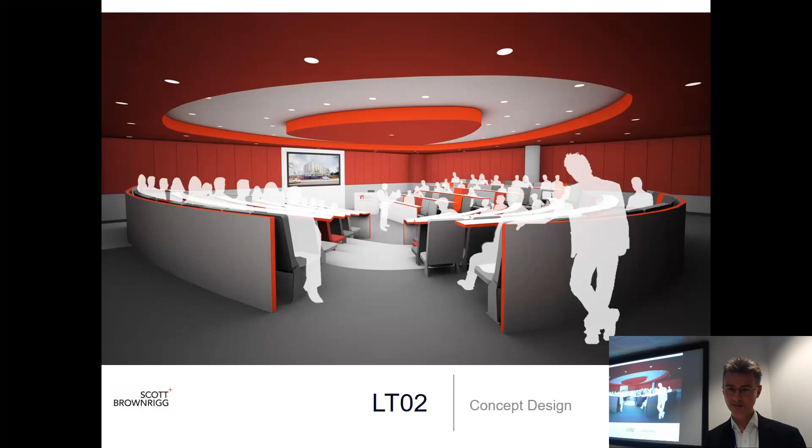Then the Harvard Theatre in the round that I mentioned, and this has actually been one of the most successful spaces in the whole university. Quite a limited headroom, but that was because we were dealing with existing levels and wanting to minimise excavations. The reason that's successful is they had no other space like it where they could rehearse courtroom-type presentations. It splits quite nicely into three distinct working groups and the like.

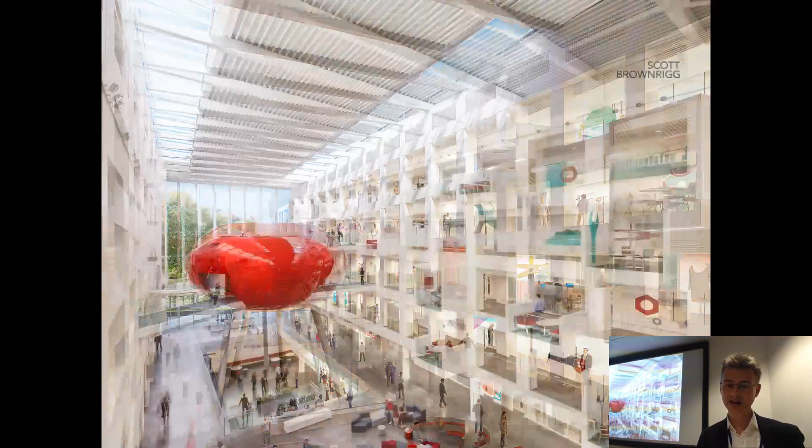Looking back the other way, so this is from one of the level 3 conference rooms. Looking down onto the pod, you can just see there people standing on the top. Informal performance and seating area here. I didn't pick the plants, but I can see why they think that works. And this is in essence the crush space, the space that allows people to move between the two lecture theatres.

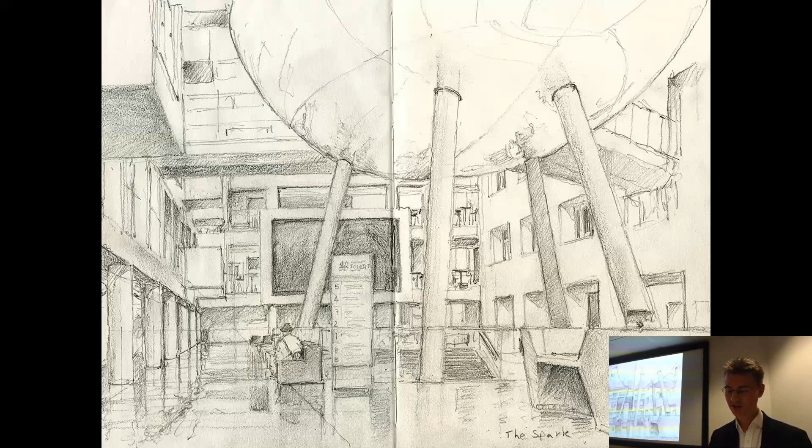This was a really quite long, arduous and challenging journey for everybody involved over that four-year period. Peter Jarvis here with the team of people sketching the building, and it's great in the evenings - light spills out from the atrium in exactly the way we hoped. It attracts interest - people stop in the street, they're gazing in and wondering what that object's all about.